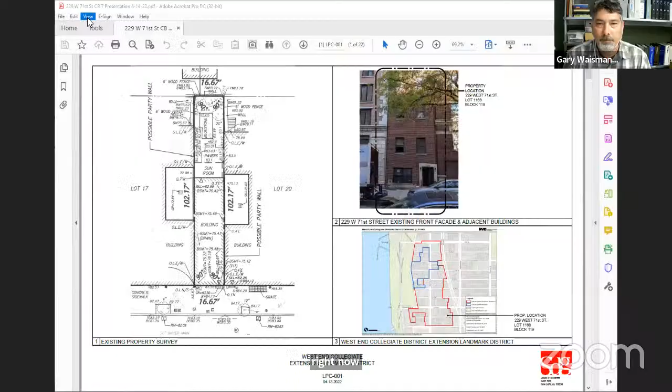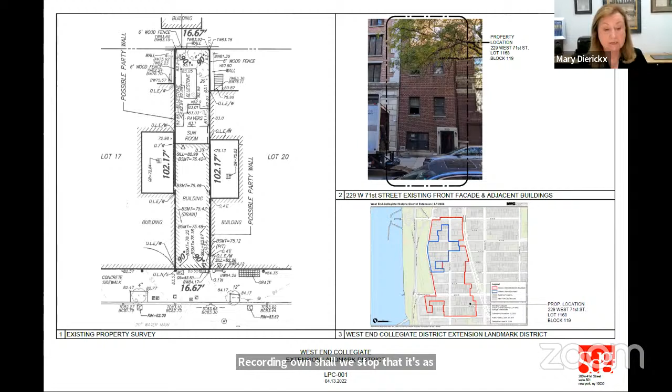All right, now we're going to do the big view. This is 229 West 71st Street. Recording on, shall we stop that? It's, as you said, an application to raise the building to 6 stories, front and back, new facade, a rear addition.

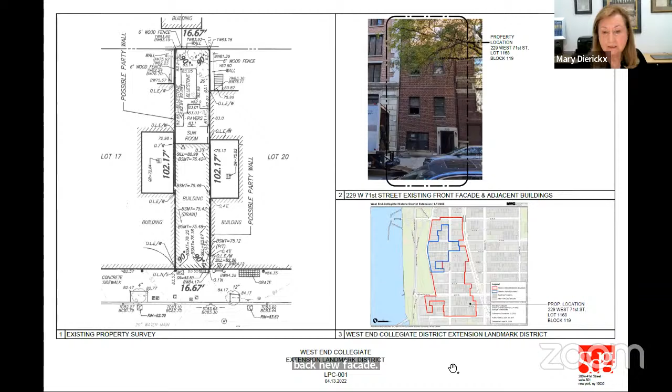It's the West End Collegiate District Extension. This is not a typical block. It goes from 71st to 72nd. 72nd is commercial; the block, that's the end of the district here, so it's not entirely in the district. The rest has row houses, a lot of big apartment buildings and flats buildings. And the smaller buildings also, especially on 72nd, have pretty much got extensions all the way to the rear. So this 229 is nestled between 2 larger apartment buildings, which extend much farther back than 229. So it's a block with not only a lot of additions, but also a lot of buildings that fill up or nearly fill up the lot.

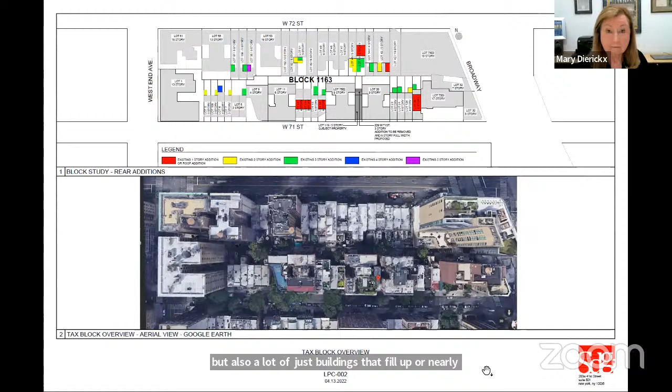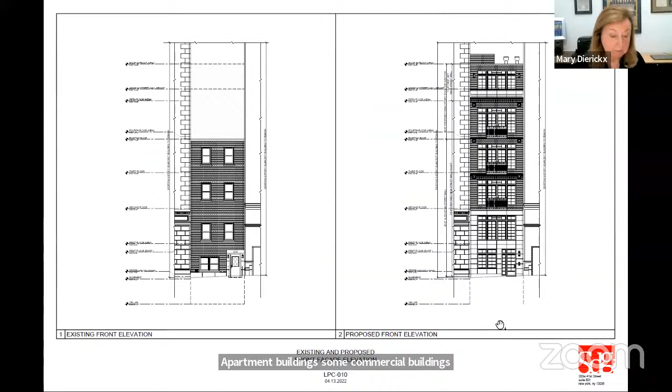As Mary has alluded to, and as you know if you've seen the building or the photographs, the building really has no real features whatsoever. It's really a nondescript building, nestled between two other massive apartment buildings.

Our intent is to remove the existing facade, raise the entry so that the building is entered at grade, and have some connection at the basement or ground level and the first floor to relate somewhat to the adjacent building on the left, which also has a limestone quoining facade, limestone facade, with quoining above. So our intent is to do a limestone facade, or cast stone, for the first two levels.

I just want to be clear on that. For the first two levels, it's more in a sort of contemporary iteration on that historic theme.

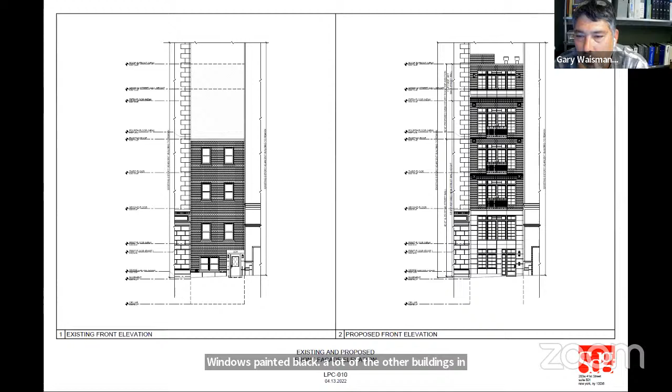At the facades above, it's a brick facade with Juliet balconies. The fenestration will be aluminum windows painted black, as in a lot of the other buildings in the neighborhood, with fixed transoms above, in-swinging doors, and Juliet balconies with railings that reflect the wrought iron historic flavor of the other Juliet balconies within the district.

The top of the building will have a precast cornice, not decorative. Again, all of the elements here are not decorative — they are modern or contemporary interpretations of those historic elements.

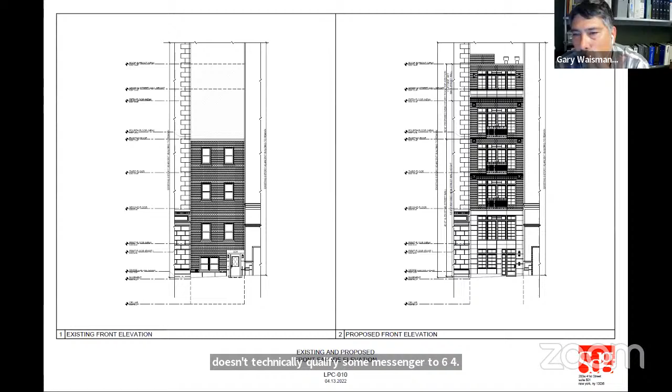And then you have the sixth floor, what could be called a penthouse or mezzanine, although it doesn't technically qualify as a mezzanine — it's the sixth floor. That facade is set back considerably from the front of the building, about 20 feet, and at the rear about 10 feet. So that's the front facade.

Does anybody want to ask questions about that part? Thanks for pausing, Gary. You can see if anybody on the committee has questions — we also have a non-committee board member here. Let's see, Mark, does anybody have questions? Jay's got a question. Yeah, I have a question.

The top floor — you're going to show us a section, right? The top floor is set back. Yes, considerably.

But you're adding two floors, correct? Correct. So the fourth floor, as you see here, what's labeled as the fourth floor, is a new level, and that will be full, matching the front facade all the way up, and that is a zoning requirement.

The building is technically following the zoning guidelines — current zoning guidelines, where the street wall is required to be 55 to 65 feet, and the top of the building at 75 feet. I may have that wrong, it may be a little less, but yes, that is correct.

So we're adding a full floor at the facade of the building, at the property line, at the street line, and then the top floor, which is the fifth floor, is set back about 20 or 22 feet, something like that.

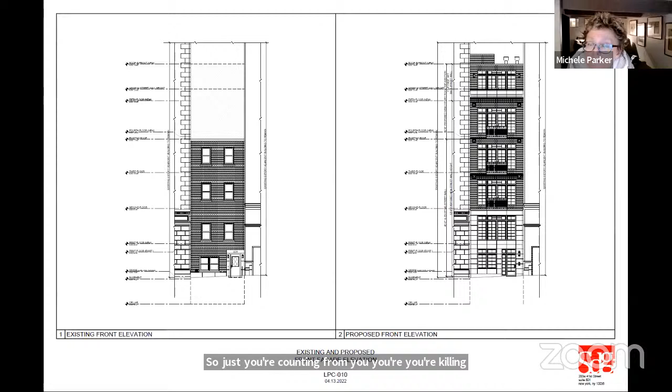So if I could go next, Michele. Sure, thanks. So a couple of clarifying questions, which will come back in my comments, I suspect. One is, I believe — I'm not sure I heard you correctly.

So the facade facing on the first — the ground and what used to be the ground and parlor floor — it doesn't look like that anymore. You said limestone or something else. Is it cast stone? Yes, cast stone, that's correct.

So which will it be, because I might feel differently about it depending on which it is. I'm not sure as of yet. We're proposing cast stone that has the color and texture of limestone. Okay, so we'll come back to that when it's time for comments.

It might help if we just finish the presentation instead, because some of these things may become clearer. Okay, I'm glad to wait. But Jay, you want to ask your question though? We can't hear you, Jay. Try again. I can wait if you think it makes sense to complete the whole thing and then go back part by part. That's fine, okay, thank you. All right, so Gary, you want to continue?

Thank you, sure. Mary, if you could just go back to the two stories. So again, the first two stories, cast stone facade — sorry, cast stone, with some simplified architectural detailing.

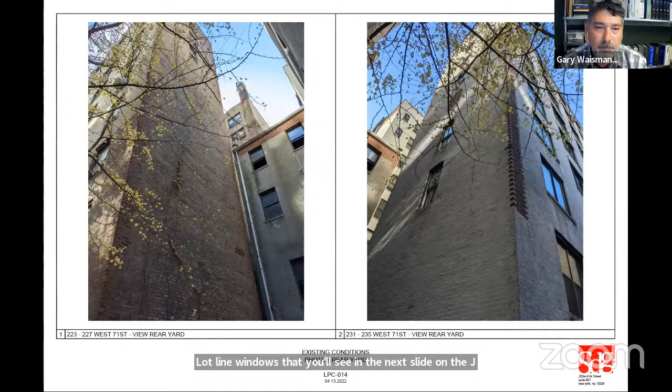So you can see the two apartment buildings. We're looking to the west. No, we're looking to the east, and then we're looking to the west. Correct.

So this is a site plan showing you what is being removed. That dotted line in the rear is the basement level or ground floor level sunroom that's being removed. And we are proposing approximately a 14-foot rear addition.

Again, well back from the rear of both of the adjacent buildings. And then as you can see, the setback at the rear of the building is 7.5 feet - sorry, I said 10 before - so it's 7.5 feet in the rear and 27 feet at the front.

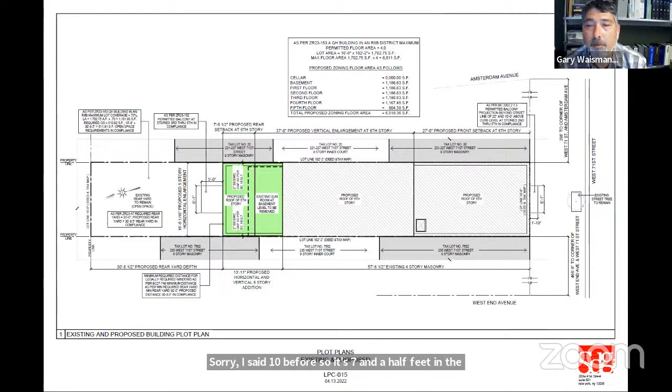So this is a section of the building. The grayed out area is the existing building, and the rest is the proposed structure. You can see there are very shallow 22-inch Juliet balconies at the front of the building, and at the rear we're proposing 5-foot balconies.

These are the floor plans. So this is a 2-family residence, not a multi-family building. It's a 2-family structure. The owner of the property intends to live in the lower unit, and the upper unit will be for sale.

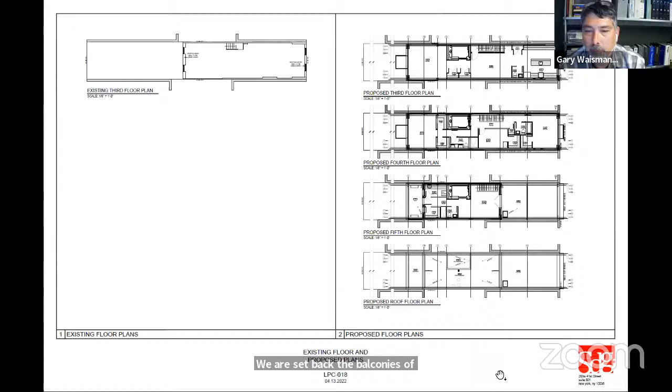Again, you can see the upper unit, the penthouse structure setback, rear setback, and the balconies at the rear and front. And you have an elevator in there, correct? That is correct - we are required by building code to provide an elevator because we're above 5 stories. There's the elevator bulkhead. Correct.

And then these are sort of the finished materials. As you can see, when I spoke about balconies, you can see this kind of black metal balcony - that's what we are thinking of doing here. As far as the cast stone architectural elements at the facade, you can see the cast stone trim, something similar to that in a very simplified, contemporary appearance. The brick is a little darker than red, a red brick with some texture.

And you'll see the water table, which is limestone - so it's not cast stone, this is limestone. This is the adjacent building on the left of our property, so our intent is to do a similar theme. There'll be a water table of a darker granite material, and then a cast stone facade and elements that will match limestone in color and texture.

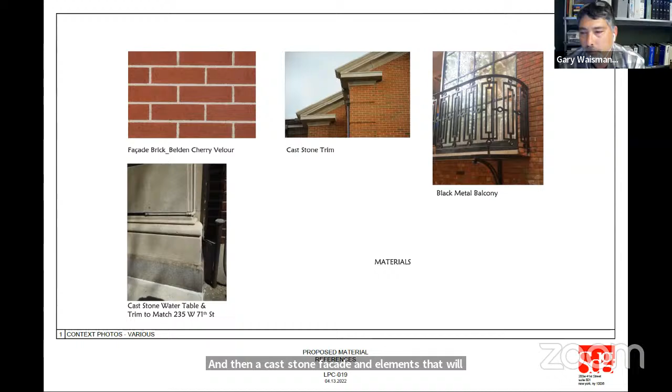As Gary pointed out, this is not a building meant to imitate anything in the district, but it respects the elements of the district, and everything you see on the building are elements you would see in the district. You would see multi-pane windows, balconies, red brick - a lot of red brick. You also see, not as common, but you see the banked center windows being proposed here in buildings of a similar size and width.

And you do see cast stone. It tended to be used from the 1920s and later, but it is something you do see used in the district. And that is our presentation. Thank you for hearing us out.

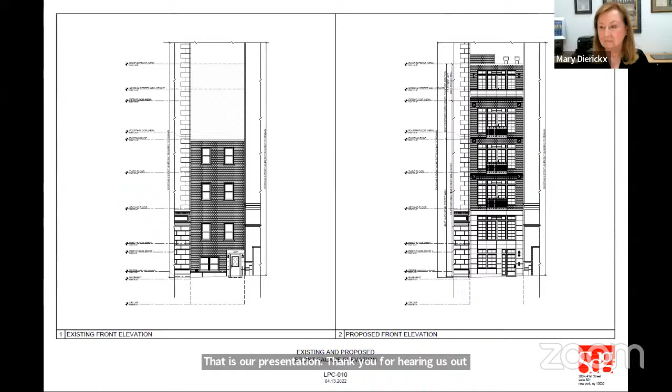Jay, you had a question. Yeah, a couple. Just an observation, notwithstanding the fact that we are a preservation committee, obviously there's not one inch of this building that warrants any kind of preservation, so that's not the issue. So we're strictly dealing with the appropriateness of the brand new design.

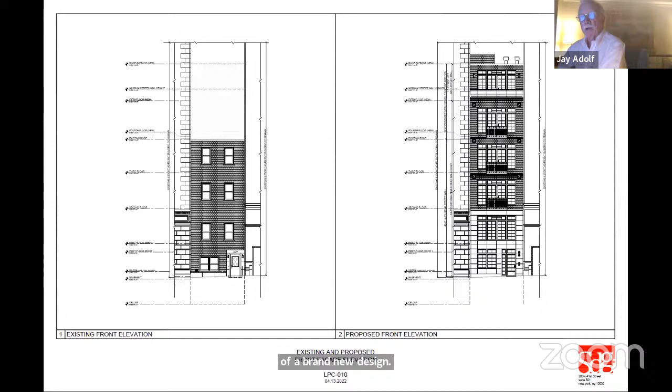Can you put up on the screen, I think it was the original or one of the original photographs showing the existing building and the good portion of the two adjacent buildings? Oh yeah, sure, that's the first slide, Mary. Yeah, that's good.

I'm basically fine with the design. I'm a little more than ambivalent about the multi-paned windows. I agree. And, you know, I understand that this building will, to some substantial degree, stand on its own.

And certainly doesn't have to replicate the designs of the adjacent buildings, which are obviously of a different era and in different condition. But I think, I don't know how to say this technically, but the multi-pane windows as you've proposed them are a little too much. I think something a little more reflective of the adjacent buildings, maybe more reflective of the building to the west, or as you're facing it to the left, would be more appropriate.

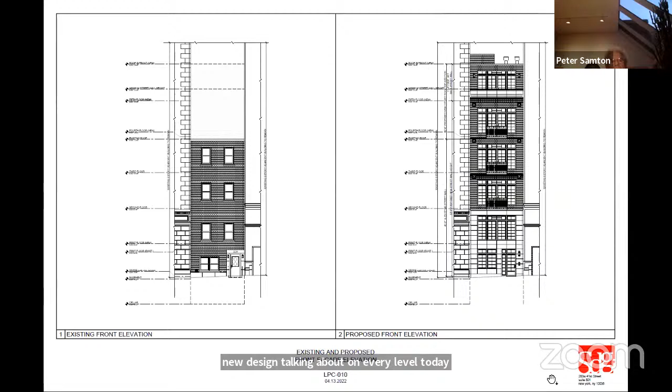Yeah, well, on the front facade, I think multi-pane windows are fine, maybe something more vertical in concept than horizontal. It just seems a little jarring to me with all this stacking of small multi-pane windows. I'm fine with industrial looking buildings, but it's a little jarring to me at this location, situated between those two traditional apartment buildings.

So Mary, thank you. Would you please respond to that, Gary? Sure. The cues were taken from some of the adjacent buildings in the neighborhood, specifically the next building west of the large apartment building.

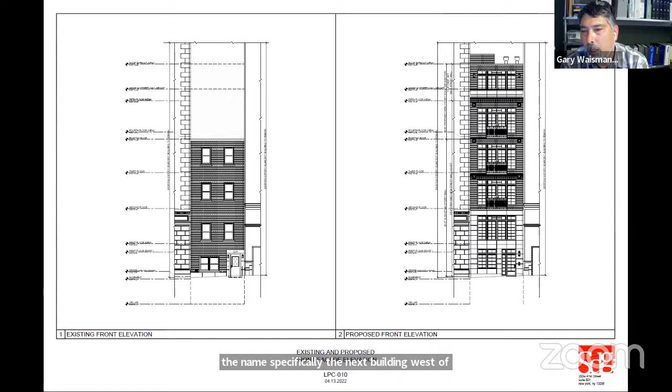And again, we originally envisioned this as more of a very modern type of building. Landmarks felt that was a little too much, so we pulled back from that a bit to introduce some of the more traditional elements, although, as I said and I'll keep saying, with a more contemporary approach to those elements.

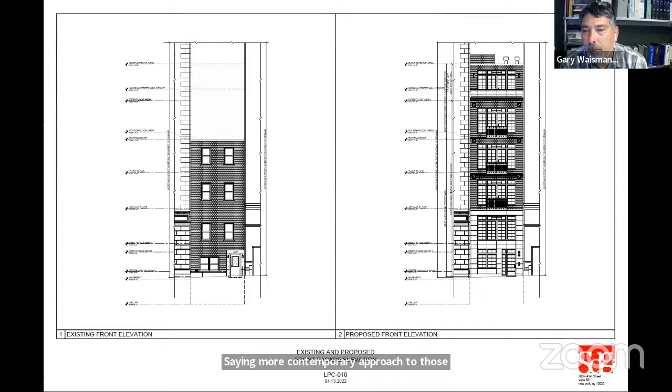As far as the multi-pane windows, Mary, do we have photographs of that building just west of the larger building? It's one of the... no, that's not it. We don't, but they do exist in the district, correct. As far as the scale of the fenestration is concerned, they're approximately the same size as the larger openings you see on the third floor of the adjacent building.

But Jay, listen, point taken. It's something the owner of the building kind of felt strongly about. I think I kind of feel a bit strongly about it too, thinking of this as more of a townhouse than an apartment building—although, being a six-story building, it's really not a townhouse, although it is a two-family residence. But point taken, Jay.

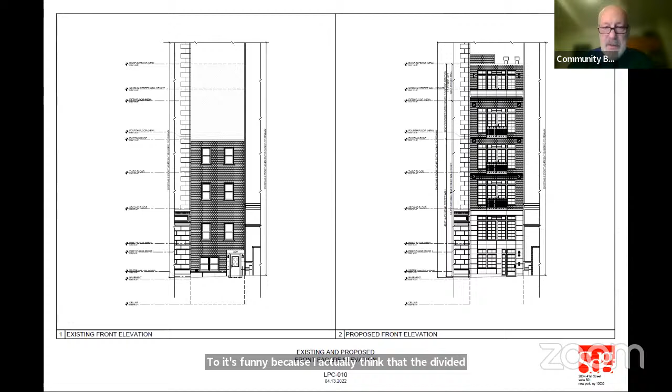With that said, I do view this as more of an apartment building than a townhouse anymore. And that gives me leave to, it's funny, I actually think the divided light windows are more appropriate to this use than they would be to a townhouse. So I think that part, I may disagree with my colleague Jay on that. It's because I view this, with those kinds of windows and that character, as being more of an apartment building than a townhouse.

That I can see my way clear to holding my nose and saying okay, with respect to the Juliet balconies, which my colleagues are already tired of me talking about as inappropriate to this district. In apartment buildings, we do see them from time to time. You could sort of call the enclosures on the windows of the building to the west Juliet balconies, although I would wager no one in their right mind would actually step out onto it. So for those reasons, I find those acceptable as a combination.

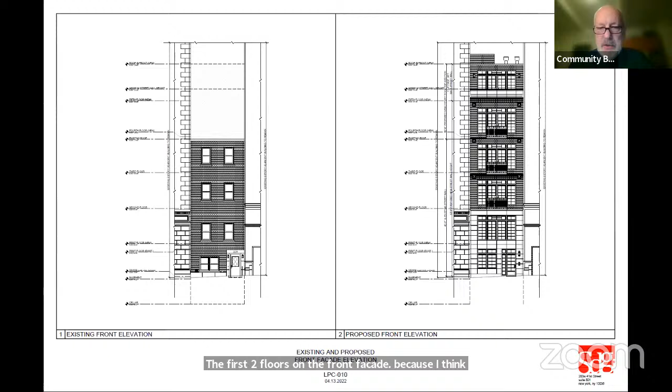I am very worried about the use of cast stone rather than real limestone in the surrounds for the basement and, well, I'm not going to call it the parlor floor anymore, the first two floors on the front facade, because I think they will weather differently and appear differently than the detail, especially on the building to the west, which this is trying to emulate or align with, and a little bit the building on the east. There are other buildings down the block - this isn't the only one that made the jump from townhouse to apartment building. So I think that's also a precedent worth including in your presentation, not just as no-style buildings, but as basis for why this is okay.

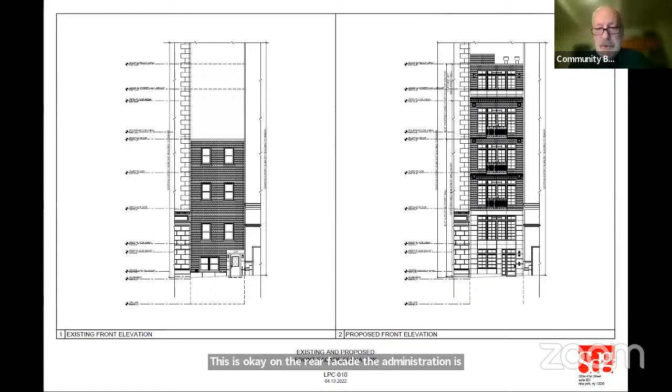On the rear facade, the fenestration is consistent with the kinds of fenestration we've routinely approved, including the masonry surrounds and so forth.

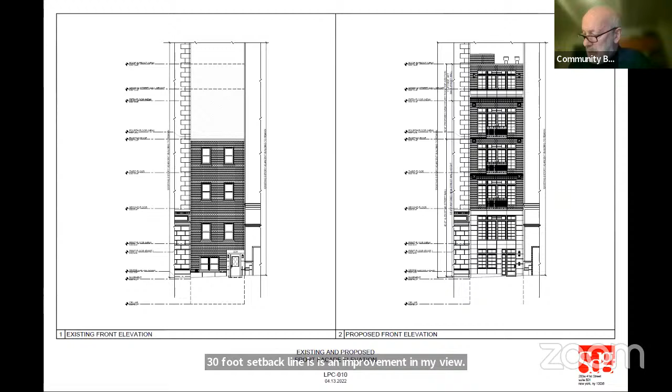Since I have another pet peeve about those greenhouses that pretend to be temporary structures and never go away, the removal of the greenhouse in favor of an actual extension that goes to the 30-foot setback line is an improvement in my view. Overall, I view these as improvements. I strongly recommend that you reconsider the cast stone, and I'm glad to hear that it doesn't block the lot line windows. With that, I'll yield the floor.

Thank you. May I just answer? Of course. Go ahead, Mary.

Yeah, we talked about limestone, and in the end, it's not such a big deal - it wasn't really a cost thing. It was the way this building is, with the large windows and a fairly small amount of cast stone, it was a better fit for the construction of the building. I do want to say, I'll go quickly - these are all cast stone, and they kind of go pretty well with the district. I understand they're not next to a limestone, but they don't really stand out as being so radically different. Those are my points.

Ira, you wanted to ask a question, but you're muted. And it's still winter where you live. No offense, Michele, it's going to be winter until it gets to fall.

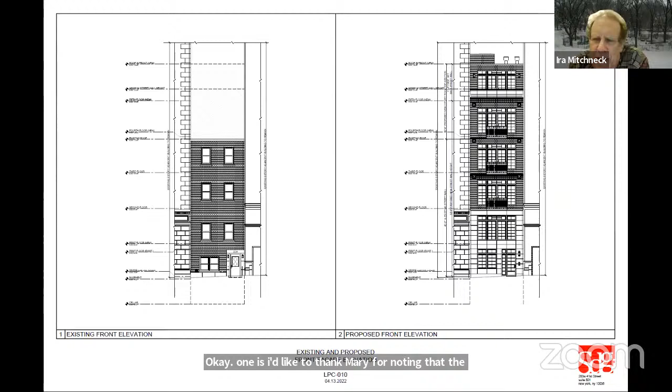One thing, I'd like to thank Mary for noting that the cost difference between limestone and cast stone is negligible, if at all - sometimes limestone is actually cheaper for some reason. But tactilely, it is very, very different, and the quality of the corners, the quality of the details are far more appropriate at grade. If you told me you were doing cast stone at the 5th or 6th floor, the difference wouldn't be that visible. But right here, it's at grade - it's what you feel, it's what you touch. So I would go for the limestone, particularly since there doesn't seem to be any cost impact.

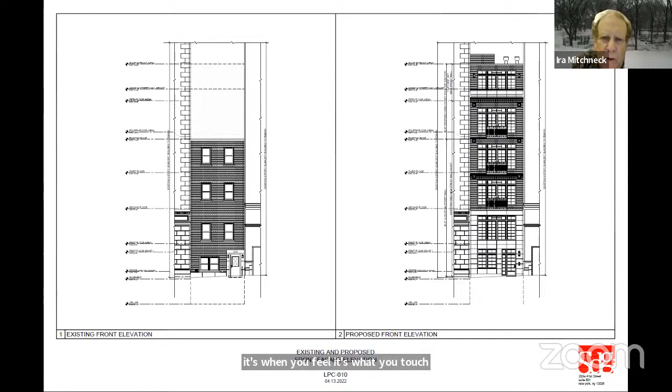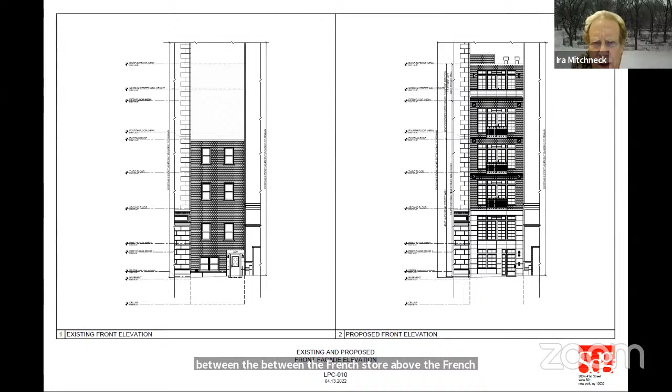And with that said, I'm going to give you something I like. Actually, I like the windows, except for the first floor windows. And I don't know what that funny thing is between, above the French doors. I'm unclear what that little ornament is that keeps showing up.

On the ground floor. Mary, would you mind just going to the next slide, which is the block?

The thing that bothers me, with the two windows on the first floor - we've seen a bunch of non-historic window types showing up on townhouses lately: awnings, hoppers, tilt turns, that have no precedence in historical buildings. I'd like to see that as a casement like the other windows. I also find the transom makes these windows rather squat and disproportional to the rest of the building. I don't think matching the horizontal mullion over the door is necessary - the proportions of the window just look odd with the transom. So that was my other comment. The mullions, the grids, I like, I'm fine with that.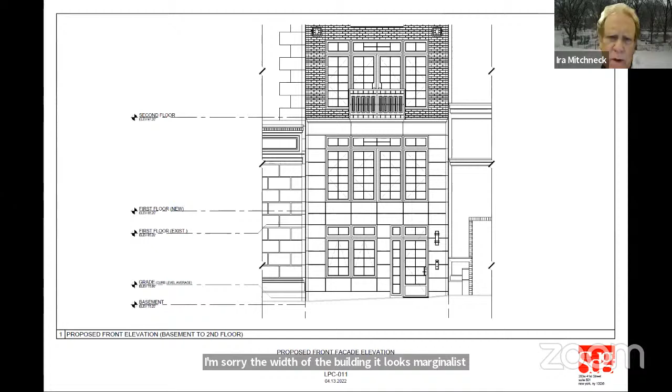One other question - I don't know the exact width of the building, but it looks marginal as to whether it requires one or two lights under the code. The lot's 16 feet wide. Oh yeah, that's one light. Oh boy, poor little building.

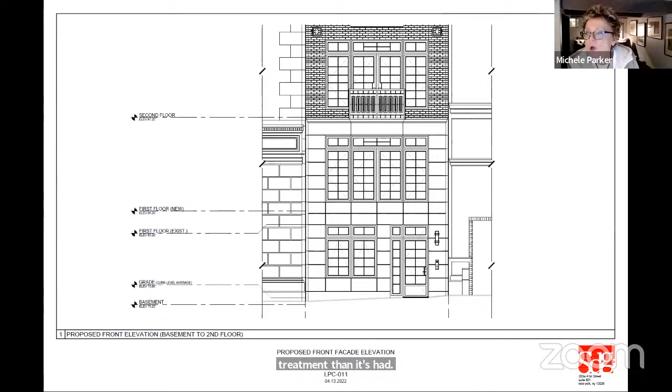It really deserves better treatment than it's had. So those were my comments. Thank you, Madge - I'm sorry I didn't call on you before. Mark said most of what I wanted to say.

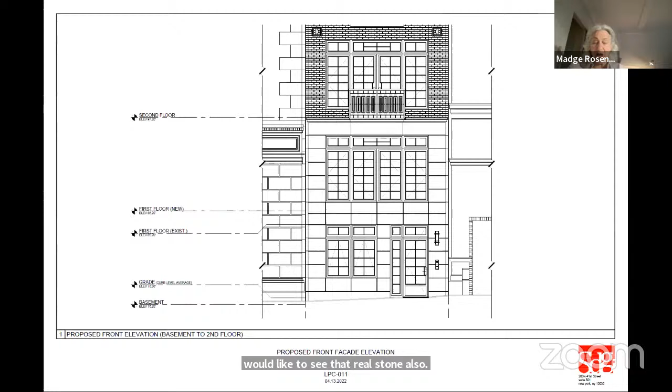On the idea of this cast concrete base, I agree it's going to age very differently, and it should really respect the buildings on either side rather than offering up some sort of conflicting problem that could happen either at the beginning or down the line. I'd like to see real stone, not cast concrete - recommending limestone instead of cast.

Can you hear me? Yes. Do you have any images of the windows of the apartment building to the west? Yeah, we saw that - that was significantly altered back in 2005. Oh, this one here, yeah. Okay.

It seems to me there's a lintel at the top of the second floor, at the base of the third floor, on the building to the west, and also one on the east. Can you show that facade again? They're the same architect, by the way. It would be good if you showed it in that drawing - I assume that carries across. Is that right?

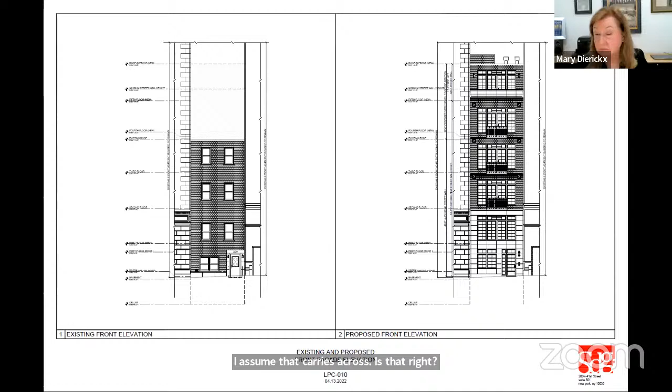The lintel on the apartment building to the west - I think it's just in the center. I'm going to switch back quickly, sorry. I know, but if you show the new facade in this, you'd see more context - what elevation I'm talking about. That would be helpful. Yeah, thank you.

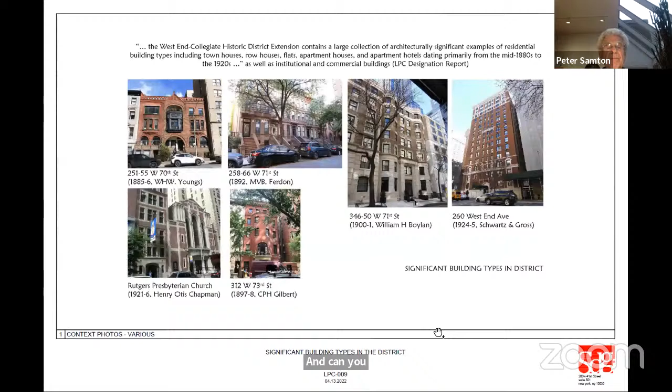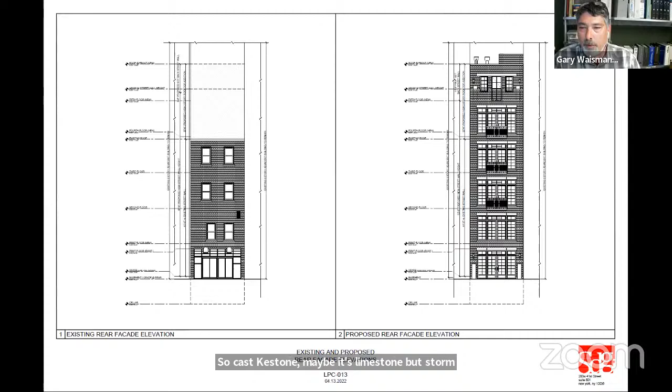Can you show us the rear facade again? The new rear facade. Is that the rear facade? Yes, it's similar to the front facade, only it's all brick with traditional cast stone - maybe it's limestone - stone lintels and sills. And let me see the front facade again. So the front facade is very much the same, with the exception of the ground floor and the second level.

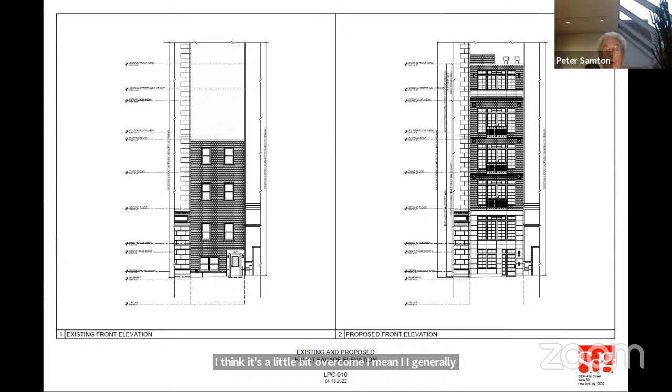I also agree with Jay about the small windows - I think it's a little bit overkill. I generally think the facade is well proportioned, and I don't have any problem with the material and so forth, but the tiny panes I think is a little over the top. I know there are other buildings in the neighborhood, but I think this is somewhat overdoing it, and I'd suggest reducing it somewhat - maybe not having so many panes per window. It looks like those panes are very small.

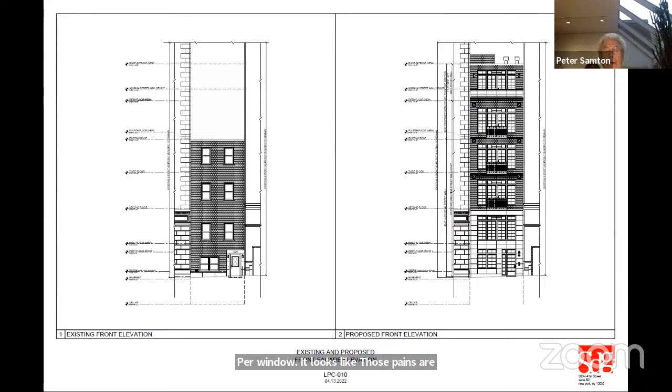That's basically my comment. Thank you, Peter. Klari?

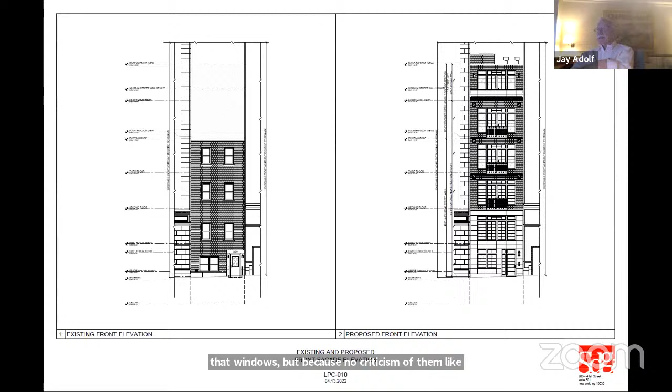I've heard differing views on the front windows, which are like the back windows, but there's no criticism of them, I think. We've heard some criticisms from a couple people as to the number of panes on the windows, particularly on the front. I'm not sure I've heard much complaint about the back.

The strongest, if not unanimous, most frequently made comment among our colleagues is concern about cast stone versus limestone for various reasons on the first two floors. I share that comment more strongly than any of the others. What I would suggest is a resolution that recommends strongly limestone, not cast stone, on the first two floors of the front, and that finds this minimally appropriate to the historic district. That's where I would end up.

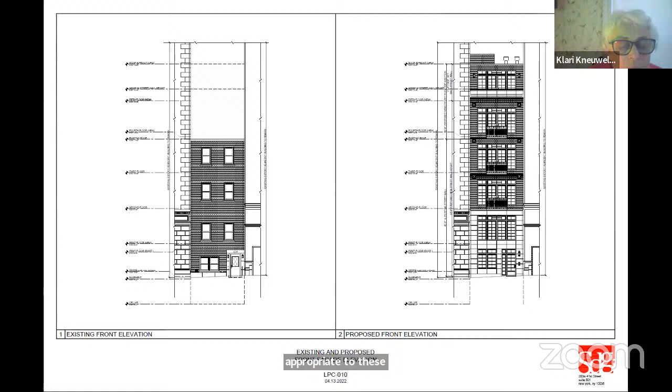Okay, we do have Susan with her hand raised. Thank you, I didn't realize Susan was yet to come. Okay, Susan, go ahead.

I just want clarification. The windows, when you take the building up the two extra floors, is that going to block any windows on the adjacent buildings? No, not at all. There are no windows on the front portion of the lot line. There are at the rear of the building. Mary, if you would go another 2 slides, I think it is.

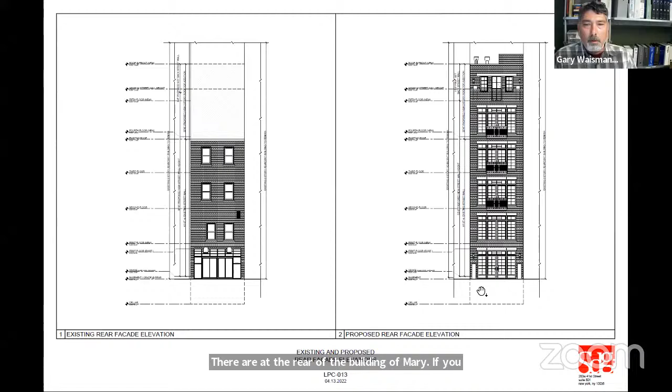No, right there, yep. So you can see there are no windows on the building to our right, if we're looking at the front of the building. There are windows well above, at the 7th, 8th, and 9th floors. These windows you see on the right-hand image are on the building to the left, and our addition will not impact those windows. We are approximately 2 to 3 feet, if I'm not mistaken, from those windows.

Interesting, okay. Yes, Susan, you look a little perplexed, and I'm the same, because when I looked at it on Google Earth, it looked like it was going to block some windows, and I was very concerned about that. So I believe you, but you're saying your addition will only go, it will still be 2 to 3 feet shy of those windows.

Correct, that is correct. I'm sorry, Mark, what did you say? The addition goes to like here. It goes into the extension of the rear facade, as I read the plans, only another 7 or 10 feet from the existing facade, which puts it — I think you'll probably be able to hand a pie from the lot line window through the new window when they build it out, but they won't actually cover them. That's what I read, but that's the rear yard addition.

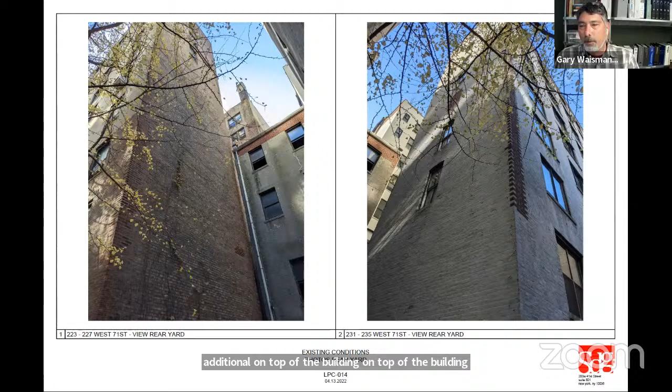What about the addition on top of the building? Well, on top of the building there's a courtyard, and there are no windows at the front, no windows on the lot lines at the front of the buildings. Okay, so there will be no windows blocked.

No, excellent. Okay, I share the concerns about limestone versus cast stone. And I have to say, I think the windows in the front are a bit — I agree with Ira, this poor little building, it's a lot of windows to stuff in there. It's true. I also agree, I used to do historic preservation survey work, and the term we would use for this building would be not no style, would be trashed. This building has been pretty well trashed architecturally speaking, but still I'm a little bit upset at the notion that you could take a little tiny sliver of a lot like this and put 2 floors on top of it, and basically, as Mark said, turn it into an apartment building.

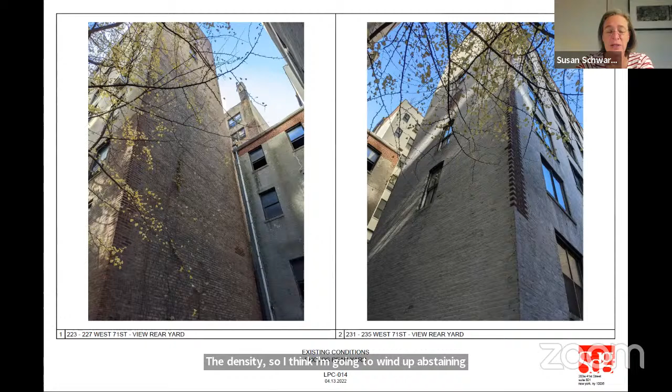And I'm not pleased about that, the density. So I think I'm going to wind up abstaining on this for those reasons. It's a little bit uncomfortable for me that this is all being done. I guess the owner has the right to do it, but it's a bit much for me.

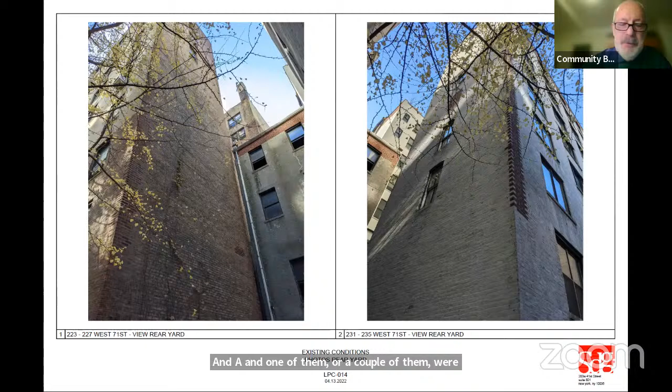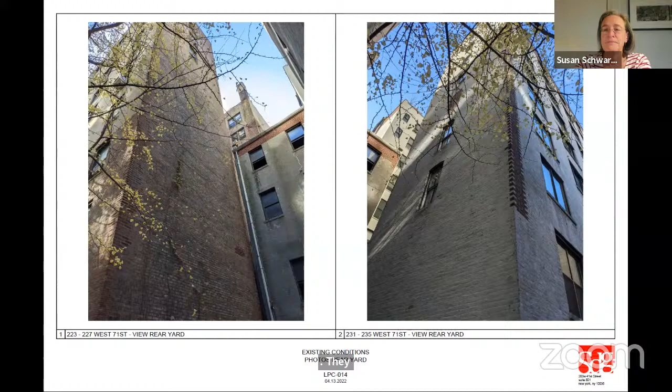Thank you, Susan. Michelle, there were a couple of questions in the Q&A, one of them by Mr. Gleicher, who also has his hand up. So whenever you're ready. Is there anybody else from the committee or non-committee board members who want to say anything? All right, thanks Mark. We can hear from Mr. Gleicher, you should be able to unmute. Looks like you are. Did I lose him? He's been promoted, Mark. He's rejoining. Oh, good for you.

Can you hear me? This is Paul Gleicher. Great, okay, well first of all, I live on this block. My wife and I did a renovation here many years ago. And I have to say, living on this block, 229 has been nothing but an eyesore. So I'm very encouraged that this building is proposed to be renovated. I'm very happy about that.

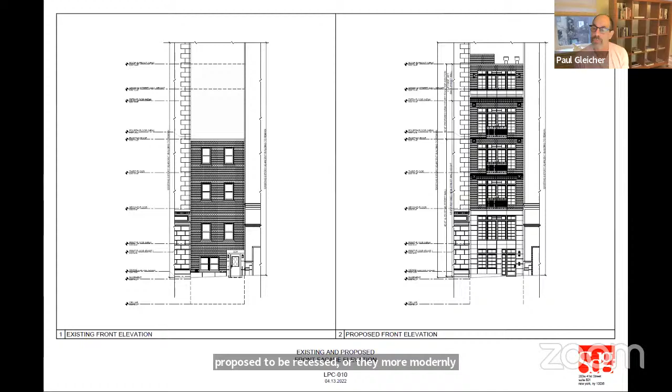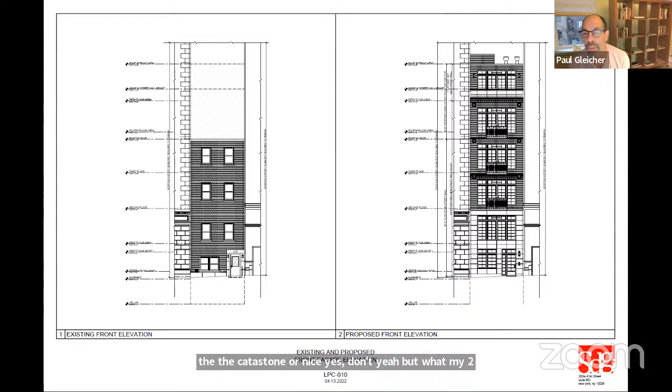I did have a couple of questions about the front facade from an aesthetic standpoint. My first question is, are the windows proposed to be recessed, or are they more modernly interpreted, flush with the front facade? No, they're intended to be slightly recessed, so there's a little bit of a shadow line. I think that would be nice. Gary, do you have a sense, are they deeply recessed, or just 3 or 4 inches? 3 to 4 inches, the return of the width of brick and the cast stone. Well, to put my 2 cents in, I think it would be nicer if they could be recessed further, but that's really for you guys to decide.

I'm trying to understand, are there pilasters running up either side of the facade? It looks like there's kind of continuous vertical lines there. Yes, so the 2 side portions, the side piers let's call them, will have a little bit of definition. The brickwork will have some horizontal banding that will be slightly recessed so this isn't just a flat brick facade.

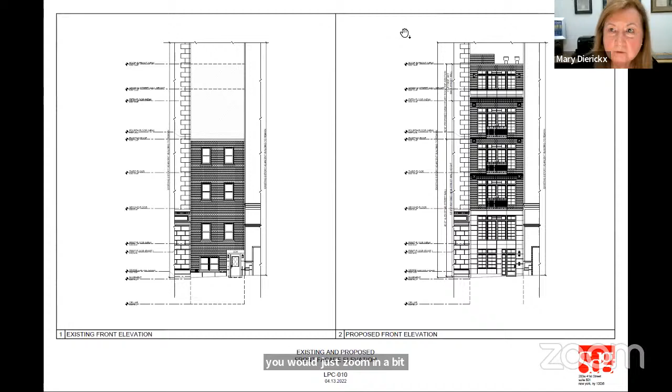Are you able to put your cursor over those? I just want to, or is that not? Do you think it'll show up? No, it doesn't really. Mary, if you would just zoom in a bit on the front facade. Have that capability anymore? No. Okay, or even the two stories you showed, the detail on the other drawing is sufficient. Sure, so I could probably answer your question graphically.

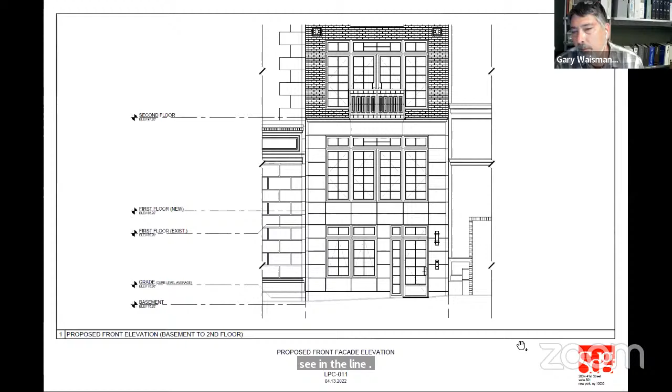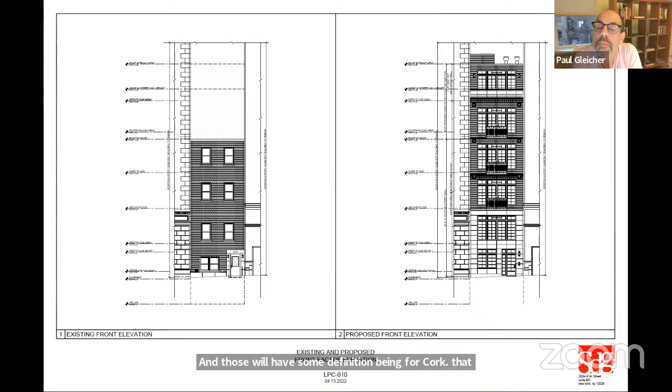So two things: one is the connection between the two adjacent buildings is a recessed connection, maintaining the same recessed connection of the existing building. That was something LPC felt strongly about, and we concurred after discussions. So there's a bit of a recess on the two sides, as you can see in the limestone, and also at the brickwork. As you go up the building, the horizontal banding of the cast stone, there's the same horizontal banding along the two sides, the piers of the building. Those will have some definition, brickwork that will be recessed every, say, 6 courses of brick, so it does visually continue the horizontal banding at the two lower levels.

All right, forgive me, just a couple other questions. I see you have some decorative elements, like the square decorative elements. What are those, just terracotta or what? No, well, there's no terracotta on this building. It's cast stone, just cast stone medallions to break up the verticality of the building and introduce a bit of a break to a monolithic facade.

The cornice at the 5th floor, that is a projecting cornice? Slightly projected, as opposed to — again, a modern, contemporary iteration of a traditional cornice, but with no decorative elements on it.

But yes, it will project. I'll throw out a number, though I'm not exactly sure how much at this point, but probably no more than a foot, maybe 18 inches at the most.

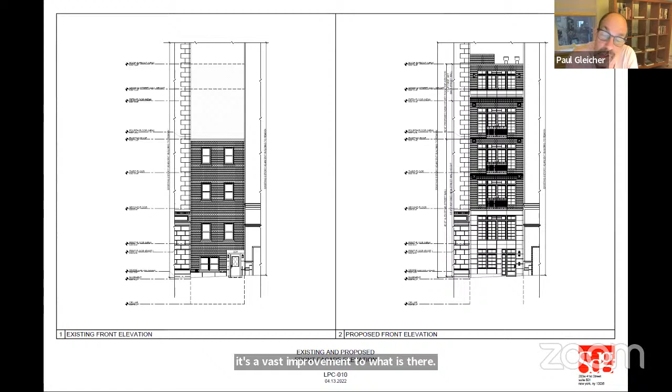Okay, fair enough. Well, I am in favor of the project. It's a vast improvement to what is there now, so I'll throw that out there. The apartment building versus single family, two-family, I do think that is a legitimate concern, but it's the owner's prerogative.

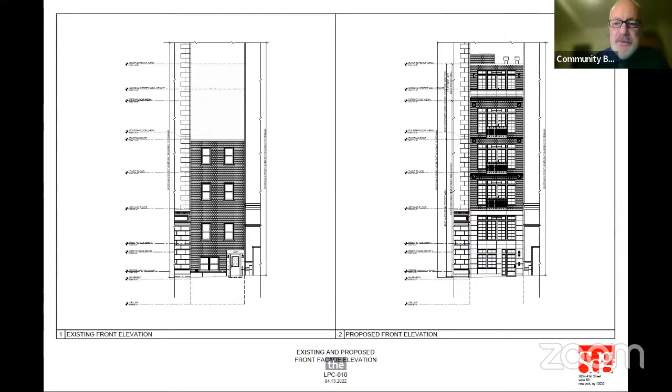Not really related to preservation, but I feel like if CB7 doesn't ask, who will? How long will the construction take? It seems pretty dramatic. What steps are going to be taken to abate the noise, the vibrations, the pollution? Seems like a big project.

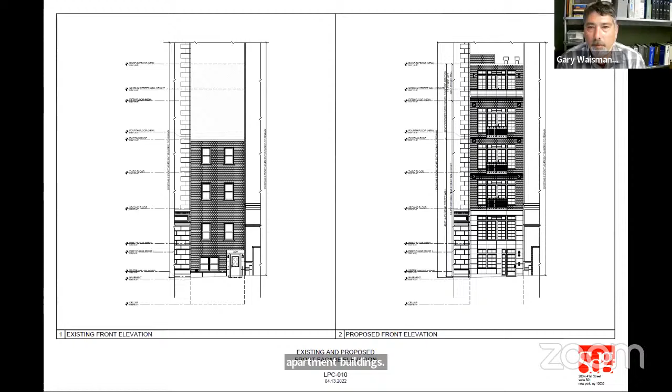So the time frame for a project like this is somewhere between 12 to 18 months. As far as noise, vibration, that kind of thing, there's no intention of driving piles here. It's a very small building, foundation work is minimal at best. Other than that, we are a relatively small construction site hemmed in by the two adjacent apartment buildings, so I don't believe there's much concern on that front.

Just one follow-up. So the extension in the back, will there be excavation to the cellar level to create a foundation? No, actually we do not intend to excavate there. We intend to do a shallow foundation. Technically, the intent most likely will be what's called helical piles, which are not driven into the ground but screwed into the ground with very small equipment machinery. Okay, all right, thank you so much.

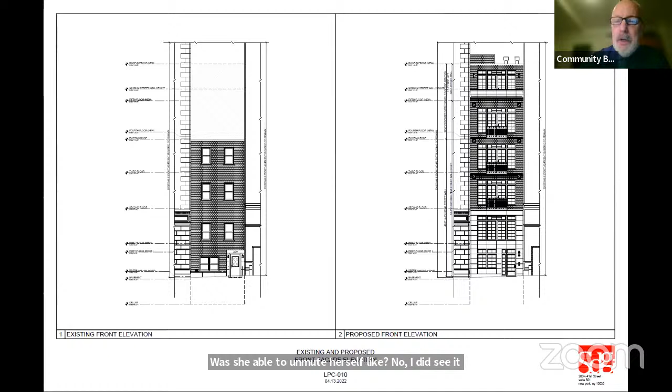All right, can you hear me now? Yes, okay, hi, Lisa Sharkey. Hi, so I'm married to Paul, he's an amazing architect, my husband, and we live and own the townhouse one building west of the building that's adjacent to the 16-footer that we actually almost bought years ago. I just want to echo what Paul said, that building has been the ugliest eyesore on our block forever, and we are the building with multi-pane windows that is just beautiful. I have no objection whatsoever.

My only concern, honestly, has nothing to do with the architecture. It has to do with the rodent issue on our block. We just want to make sure that proper extermination is taken into control when this demolition is happening, because unfortunately we have had a really awful rat situation on our block, and any construction of this sort is just going to stir up these populations. We have spent thousands of dollars to try to mitigate this, and I just want to make sure, if possible, because I think I wouldn't be the only one who wouldn't want even more rats running around here.

So other than that, I think the design is beautiful, and I really appreciate the care and time that you've all taken to create such a lovely design.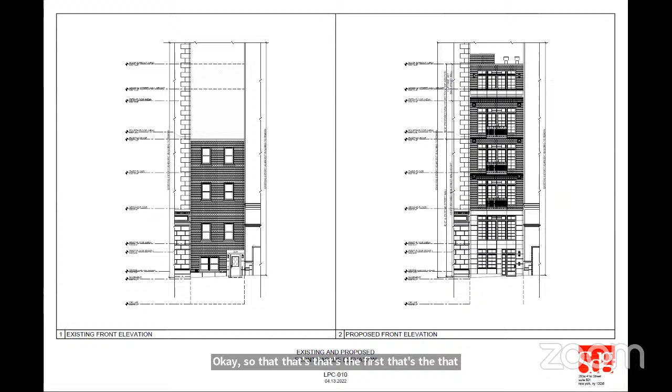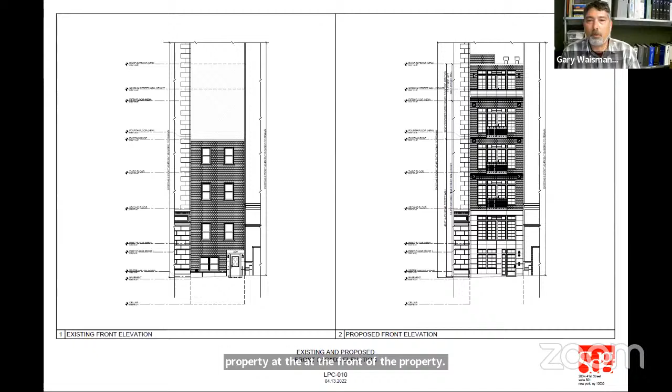Okay, so our excavation at this site is minimal. We're not excavating at the rear. As I said, the intent is to use helical piles. It'll be a mat foundation at the rear of the property. At the front of the property, we are doing some demolition of the front foundation in order to accommodate a new foundation to support the new facade of the building. And yes, we will certainly take into account precautionary measures, as well as the required seismic portions of what we're required to do in a historic district and all the rest of it.

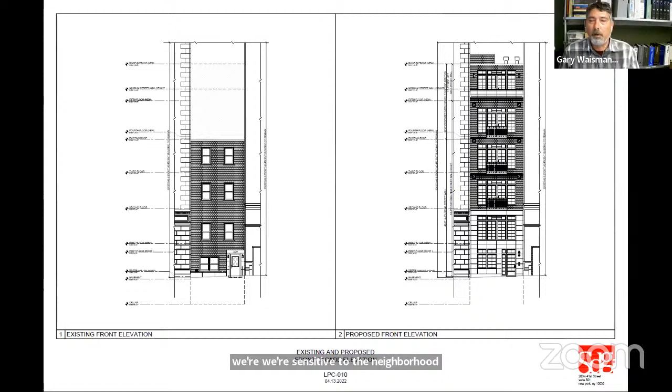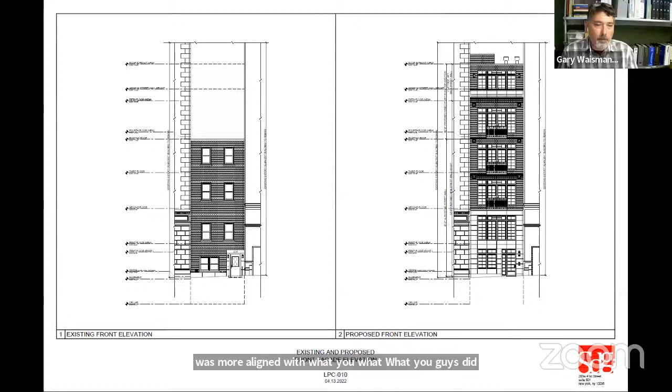So certainly we're sensitive to the neighborhood, to the adjacent buildings and the rest of the buildings. I'm assuming you're the building right after the apartment building to the west of us, if I'm hearing that correctly. Yep, we own it, it's a single family, the eco townhouse. So I can say that the original iteration of our building was more in line with what you guys did there. Windows are a nod to your building, color-wise, appearance-wise, all of that. And certainly we will be very cognizant of the impact our construction will have on the neighborhood.

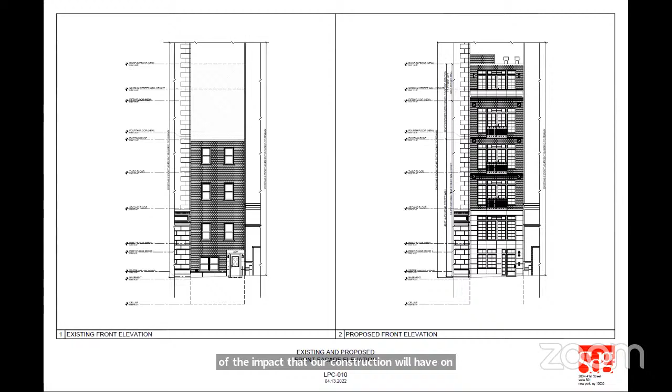Thank you, thank you, thank you. All right, now notwithstanding what you all have put me through, and I understand, Lisa, don't get me wrong, every time a rock is moved in this town, ten rats show up.

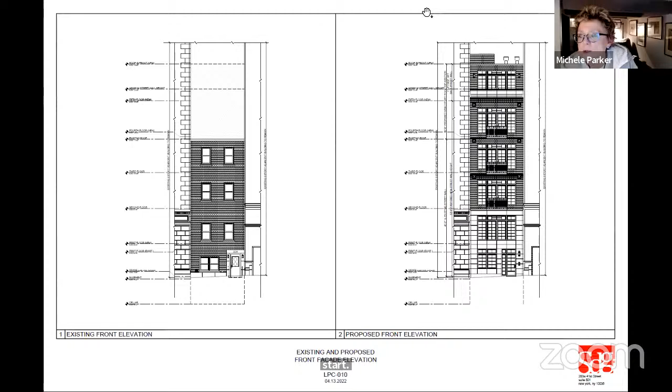Very upset, but we will close the discussion on this matter and start - may I suggest from Klari's point? You want to repeat what you said earlier, Klari? Mary, I will, let me see if I can do it the same way.

What I was suggesting, and it hasn't changed based upon all the other people who've spoken from the community, is that we have a resolution to approve with a strong recommendation that the stonework at the first two floors be limestone rather than cast stone. I much prefer limestone, but I don't think I would disapprove solely for that reason. I know the recommendations we make are just that, and they don't go anywhere unless the applicant takes our recommendation seriously, but in any event, that's how I would do that.

And Paige is back with us. Anybody have anything to say about the reduction of the number of multi-pane windows on the front facade? Well, I know Peter and I have expressed we don't like them, but I don't know what the sense of the other members of the committee is. If I were voting on the resolution, I would prefer not to make it conditional on a reduction in the number and an increase of the size of the multi-pane windows, but I don't know how the rest of you feel about including that in a resolution.

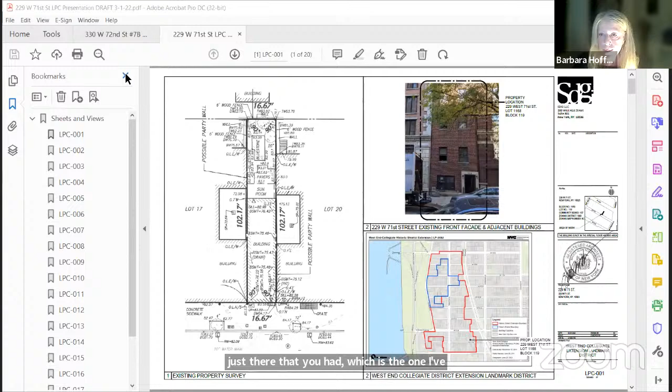Can you see my screen? No. Here? I'll bring up the one that you sent previously. I sent one previous to that, which is the one I submitted to the committee, to the office. That's the prior one. That's not me, that's a 71st Street location. Not my submission.

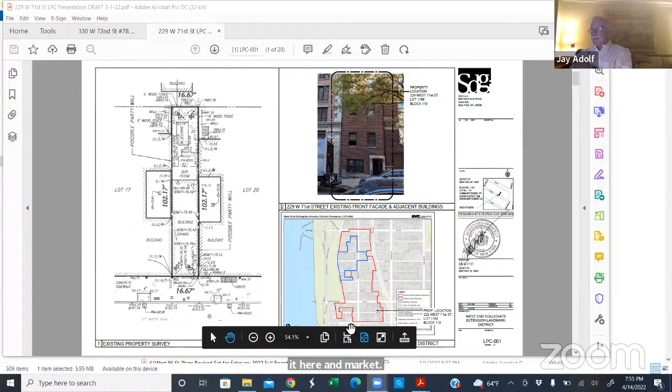I'm viewing Mark Diller's screen. If you allow me to share my screen, I have it here. Mark, you keep putting up the last one. And you're muted. You have the ability under Zoom to share your screen. If it's not working, I know, but I have to be allowed to do that. No, you've been allowed to do it. Got it.

Nothing's happening. All right, why don't you just put the other one up and I'll use the photos, not the handwritten note, because it's not working for me. I'm not able to. So is this the one you wanted? Yes, wait a minute, maybe I figured out where it says more. Ma'am, could you take a look at the screen and tell me if that's what you wanted us to put up? Yes, exactly. Okay, so let's do this. Mark, you're going to be in control of the screen, please, as best I can. Thank you.

This is actually what was submitted to the Landmarks Commission, the general project description. I think I can just talk to that right now. You can tell us how many windows we're talking about and what you want to do. All right, if we can get to the visuals. Stop right here, this is good.

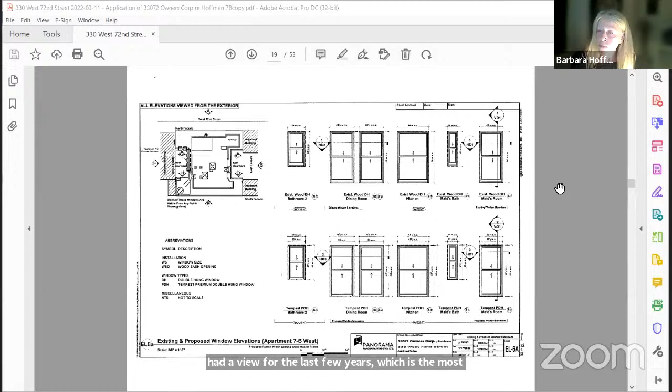No, that's not accurate. I said exactly, I am accepting that. I would have preferred wood windows, yes, but I didn't have time. So I am happy with the Panorama windows. I am not happy with having bars on my windows, having had a view for the last few years, which is the most significant attribute to my apartment.

Excuse me, I feel like I'm clueless about this. Can somebody else help me out? This is, I'm not sure. This is your presentation, we didn't get it from anywhere else. So what slide do you want me to put up?

No, all right, I can start sharing my screen if you let me share the screen. And you've had the power to share your screen throughout, so I don't understand. No, you are not letting me share the screen. It says while other people are sharing, my screen, I can't share my screen. So I'm not being allowed to share my screen.